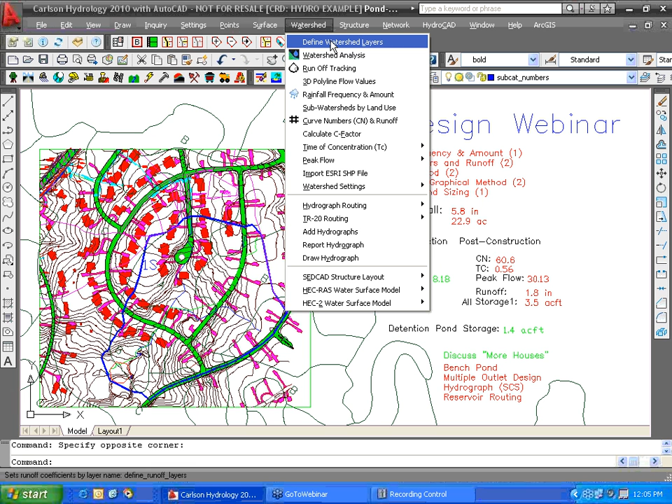The starting point for this process, internal to Carlson Hydrology and for feeding into HydroCAD, begins in the watershed pull-down, Define Watershed Layers. Can't say enough about this very first command in terms of its critical automation.

We can do our watershed runoff analysis by the rational method, but for feeding into HydroCAD, and for detention pond sizing in general, we recommend the SCS method.

And if you click on HydroCAD layer designations, which are several pages with this form, I have a short form so you can relate to it easier for this example. This is a HydroCAD look, if you will. Okay, we're going to do the SCS method.

In addition, your eyes need to go down to this lower zone and note some of these layers for the automation. For example, we can have soils.

If I move this out, I have soil boundaries with soil types designated by A, B, C, and D - simple letters within boundaries that don't have to be closed polylines. They just have to meet and enclose, as separate lines or closed polyline regions.

These soil maps are available on NRCS sites and various state sites all across the country. The country is almost fully mapped in terms of what's available electronically.

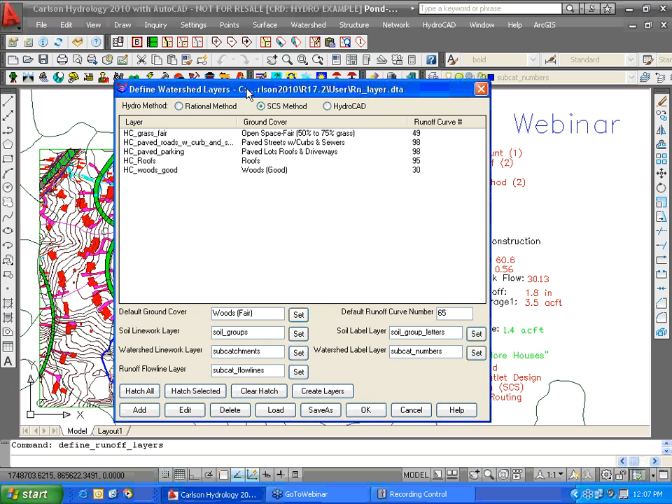So this blue watershed here is drawn in the subcatchments layer. And we've even drawn a runoff line, calculated by our runoff command, in the layer subcat flow lines. So everything is accounted for here.

Just for a quick look, for example, the red roofs on these buildings - if I click on HC roofs and hit edit, you see a hatch, color red. I have a 95 runoff curve number, and it's coming from a library, editable, which has distinct runoff coefficients or curve numbers based on soil type.

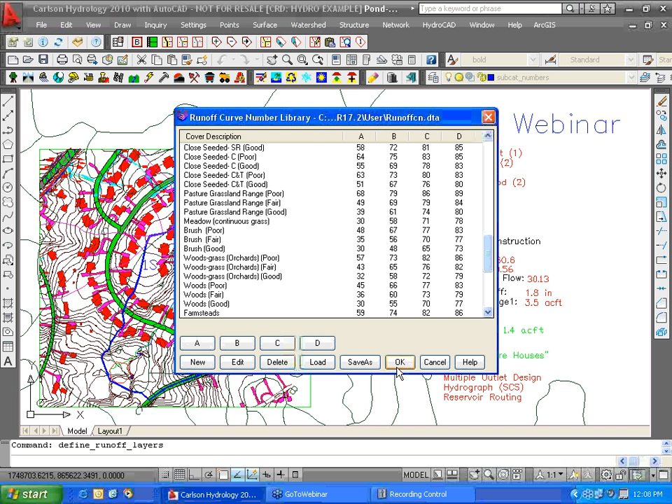So when you have woods, for example, good woods would absorb more of the rain, letting less runoff - lower runoff coefficients or C factors, curve numbers. We have quite variable results depending on the soil type. Okay, so this is how each one is defined up here.

Now it leads to this hatching. If I clear my hatch, you see it goes away. So this hatch is primarily a verification tool to be sure that it looks good. I just hatched them all again, and I'll hit OK and exit.

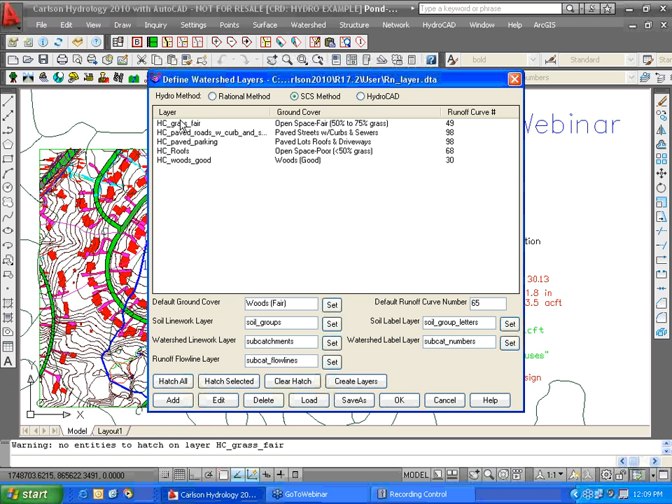So this starting point, both the hatching up here and the layering down below, set up the entire automation process. Now we'll review this procedure, first taking it in, and then we'll go through individual items.

One time - that's why it's in parentheses - you need to determine your rainfall event, rainfall frequency and amount, to set your rainfall for the calculation of the detention pond sizing. You're going to use the 100-year event, 50-year event as second.

Then, twice, you would do your curve numbers and runoff - once for the pre-construction condition, and again for the post-construction, leading to different curve numbers. Now I've got my answers here that we will recreate on the fly, but for reference.

Then you do the time of concentration twice, for pre-construction and post-construction. Then you do your peak flow twice, pre-construction and post-construction. Then, focusing on post-construction, note your runoff condition, and as a point of information, what size pond would store all the post-construction runoff in case you have no intention of reducing the flow and just want to capture it all. That's worth noting, and it's reported in one of our watershed pull-down commands.

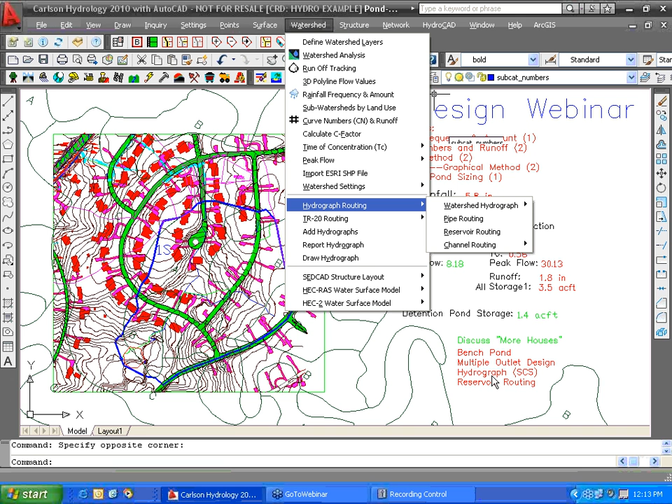Through a designed pond with outlet structures, which give you a stage-storage curve and stage-discharge curve, which then, through the reservoir routing command, lead to final verification that you've got the right stage discharge to reduce your post-construction flow from 30 CFS, in this case, down to 8 CFS, the pre-construction condition.

Okay, so the roadmap is important. A map of how you work your way through the package is critical. Now we'll do a few of the commands. Certainly under rainfall frequency and amount, that's very easy to do. I've already made a tin, by the way, out of this.

I should point out, when you make a tin file of the surface, it's best when you have nothing but a contour map to work from, to add high and low streams and ridge break lines yourself as 3D polylines. I have that particular stream break line, and sort of a ridge break line over here, another stream break line, and they help draw the water in, getting a more accurate surface for the area involved.

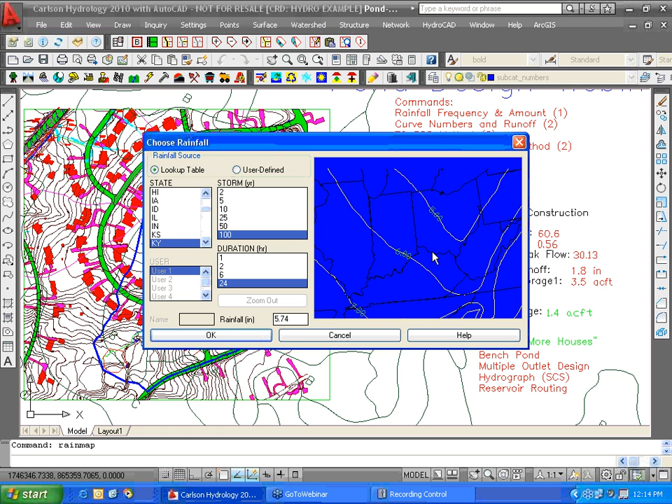Okay, frequency and amount is very straightforward. You pick this command, select a point on the map, or go find my state. I'm very familiar with where we're located, Maysville, Kentucky. I'm going to do a 100 year, 24 hour event, pick just around Maysville, and get roughly 5.74 inches as the rainfall amount. Now I would go straight to runoff.

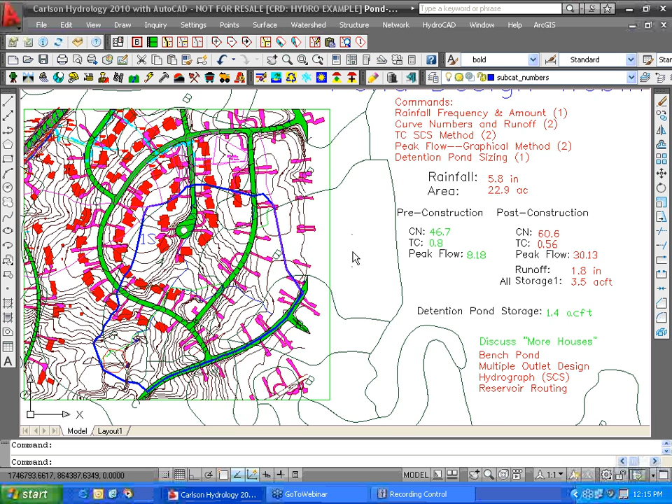Now what I'm going to do is increase automation. To continue the roadmap concept, I'm going to do this in the regular watershed and structure pull-downs, and then reveal the added automation found under HydroNet Explorer, which is also the doorway into HydroCAD. So I'm heading there ultimately, but I'll go through this process as already outlined first.

Okay, so the next thing we're going to do is get those curve numbers, that's next on our list. We have our rainfall, roughly 5.8 inches. The area, you can compute that boundary as 22.9 acres. I want to get the pre-construction curve number and the post-construction curve number.

Let's go in and do the pre-construction, what I would call the old-fashioned way. The first thing I'm going to do is go to View, Isolate Layer, and isolate to my soil, two layers involved, line work and letters, and to my watershed.

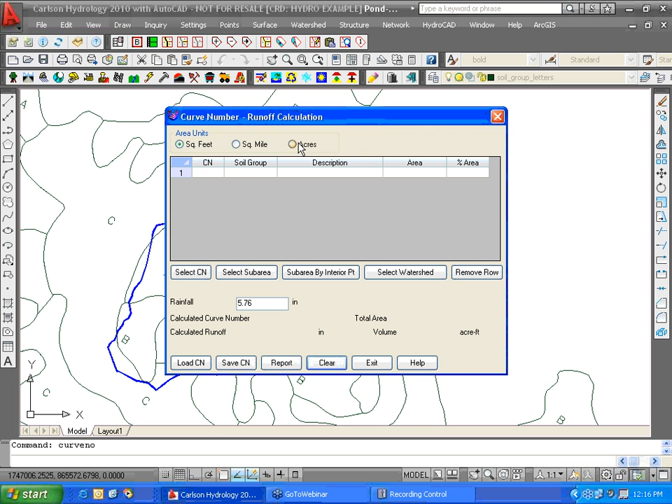Then hit Enter, and there you see the soil zones laying in behind. Now here's what I would call the old-fashioned method of doing this. If I come into curve numbers and runoff, I can clear what's there, switch to an acres mode, and select my curve number.

Let's say the entire site was good woods. So we go down to woods, but it's different soil types as you see. So I go to woods, good, and focus on A first by clicking A down here. Now I've got the zone, but I don't have the area. To get the area, I can do sub-area by interior point.

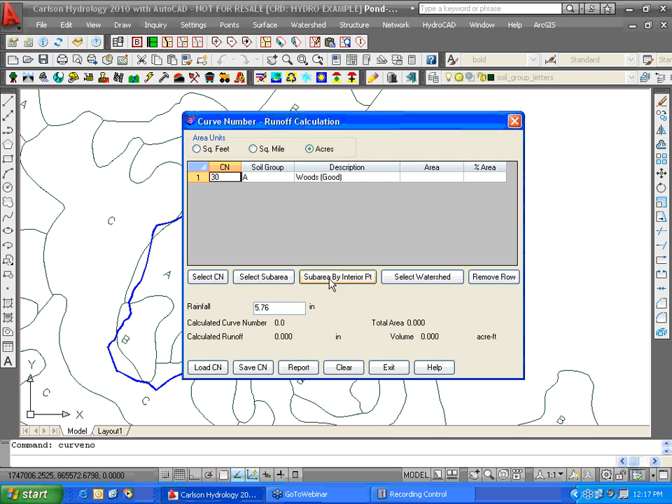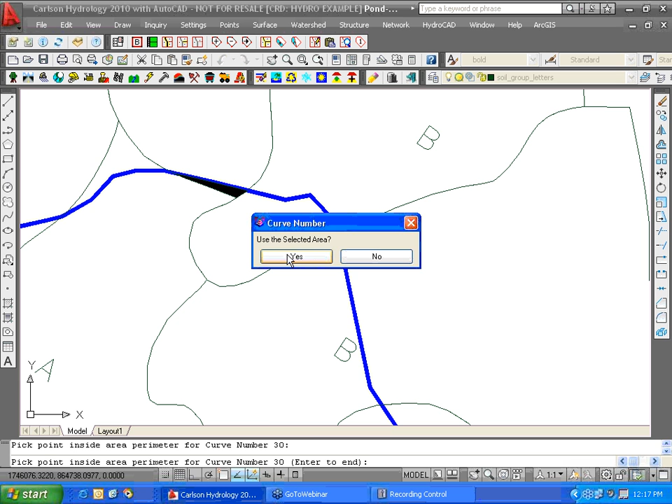All right, so I look for A's. This is an A here. Include it, yes, but I'm not done. I can kind of scroll in and get that little bit of A there. Include that, yes. I can come back out, and there's a little bit of A coming through over here, and I get that one. And that's good, and I hit Enter. Look at the command line, Enter to end. And I've got my entire acreage, 10 acres of the A zone.

So I go to my second line, select my curve, how it was done, in the old days with our package before increasing automation, but you need to witness this. I hit B, and I'll complete that process.

We'll click into it and pick some sub areas by interior point. I hit the B here, use it. I got some more B over here, use that one. I can see some B down here and use that one. I think that's it for the B, and hit Enter and continue on with select curve number, and you're getting the idea here. That's the purpose of these webinars, is just to get the mechanics of the process.

This is soil type C in my good woods, and I click into that zone, so I know that my sub-area picks are going to go to that particular zone, and I pick sub-area by interior point, and let's get some C. We got some C here, and that found its way all the way around. That's good. And is there any more C? A little bit here, it looks like. And I think I've got everything but the remaining D at this point. Hit Enter and wrap it up with select number.

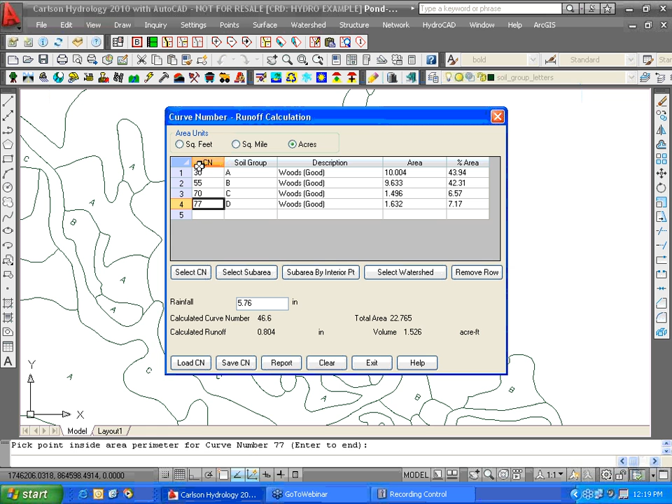We have a calculated runoff of 0.8 inches, and that volume would store everything there. But remember, this is pre-construction. So I can make a report out of this and send it on with some header information, but I'll get out of there and hit Exit. That is all recorded.

Restore my layers, and we have a 46 curve number by doing that method, and TC and peak flow, yeah, continue on and do that process. So when we come down over here, we've completed our curve numbers and runoff. In tune with that command as we work down. Remember, we do it twice.

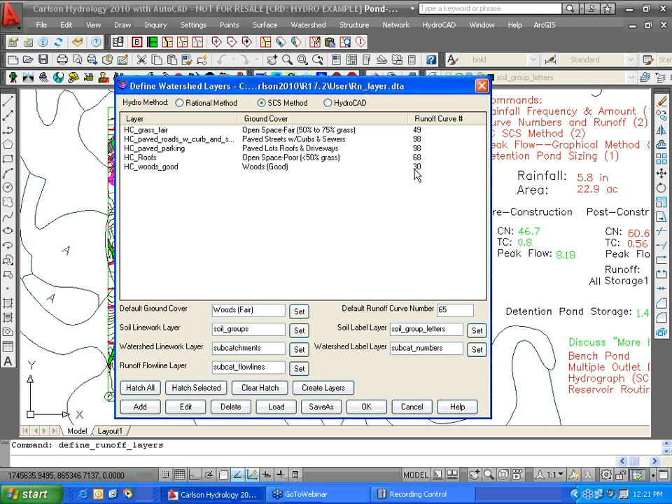Now keep in mind, these will actually pay attention to the soil types automatically in the curve number calculation routine. Even though only one curve number shows here, it shows the A column by default. Remember, the woods were 30 for the good woods. This is a little bit, you have to understand this. It's showing the A column by default, but it's going to calculate all the soil types, composite the curve number up automatically with those layers defined using this command, curve numbers and runoff.

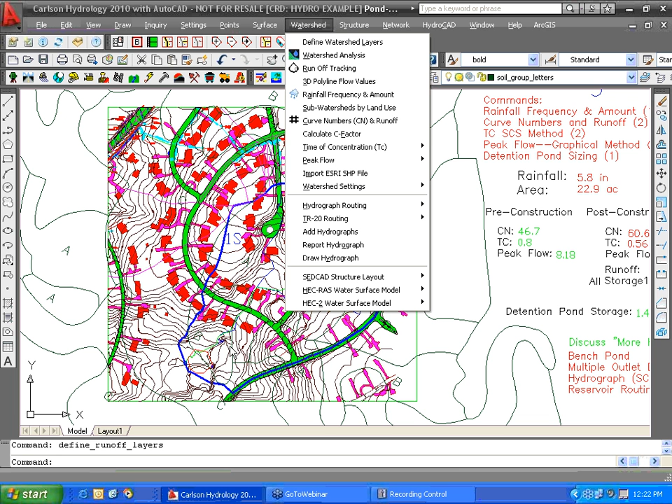Now, it would be difficult to do the existing and the final in the same drawing because it actually finds all frozen layers. So if I wanted to do the existing, instead of that pick one at a time approach you saw earlier and just had one big perimeter for the woods, I would have to have that in a separate position moved over to different coordinates or in a separate drawing, because it will find all layers thawed or frozen when it does this process. I only have the layers for my design working right now, so I repeat that command.

I clear what I have previously. Hey, note, 46.6, pretty darn close to the 46.7 worked up in preparation for this. 0.8 calculated runoff, there it is. So these numbers are right there.

We're now heading over to the post-construction condition. We're looking to get those two numbers. So we clear what's there and then do a much more automatic thing than the one-by-one interior point pick. We do the select watershed approach. We hit select watershed, look at the command line, perimeter or interior. I hit enter for perimeter and pick the perimeter watershed.

It calcs, it's doing all this sort of GIS level cutting in just a split second, and there you have all 4 soil zones of Woods Fair, not just the one in the list of soil type A, but you have all of them. Actually, I must be using Woods Fair in this condition as opposed to Woods Good for the post-construction condition, which may make sense with all the construction that goes on. No, this is the, yeah, I have a little bit of remaining post-construction condition on woods, apparently.

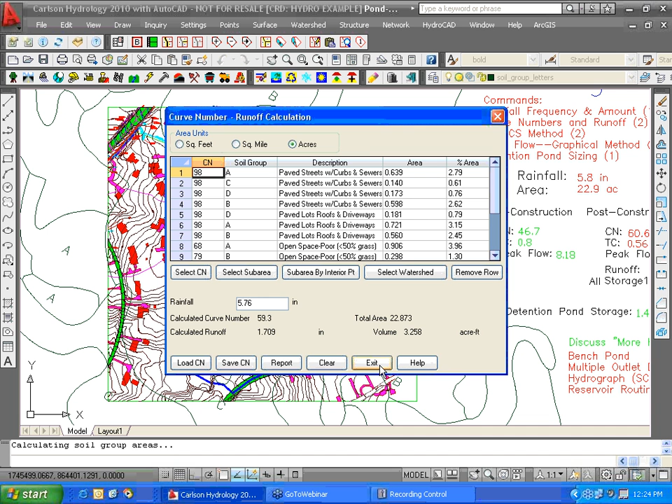And then we got these numbers here, and I got 59.3 versus 60.6. Let's see here, that's very close, so that looks good. And look at our calculated runoff, 1.7 and 3.3. Let's take a look at what we had calculated, 3.5. Basically, the source of the numbers by just clicking the perimeter. All right.

Now, the next step is going down the numbers and runoff, both ways, interior pick and where it cuts through everything, soil types and layers. Now we go down to time of concentration, and we do the SCS method. Now, some people would call this the objective method. There's a lot of subjectivity in the TR55, and Peter has sort of explained to us many times that this was almost a paper and pencil kind of cheat sheet approach before computers allowed the pure objective automation of the SCS method. Let me show you what I mean by the objectivity of this method.

If I come in to the SCS method, I get a simple dialog. Where I'm starting with, well, how about 46.7 for the pre-construction condition? My length of flow, I can pick flow line right there on the map. So I select the flow line and pick it. It finds that. Now this is neat. The average land slope, now that's not of the flow line. That's of all the land inside your watershed. That's where the automation of computers comes in.

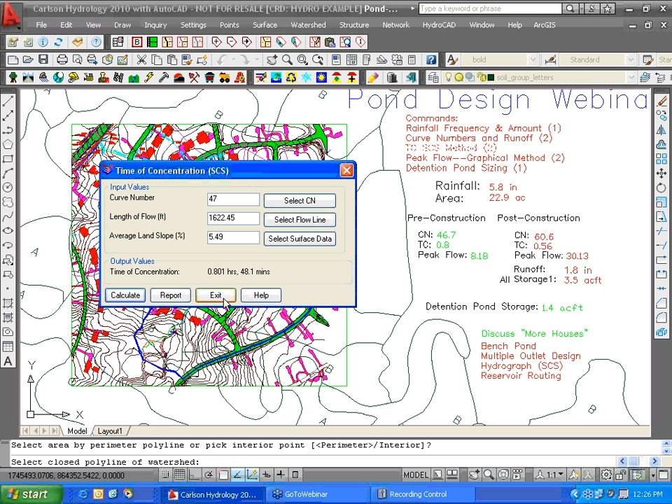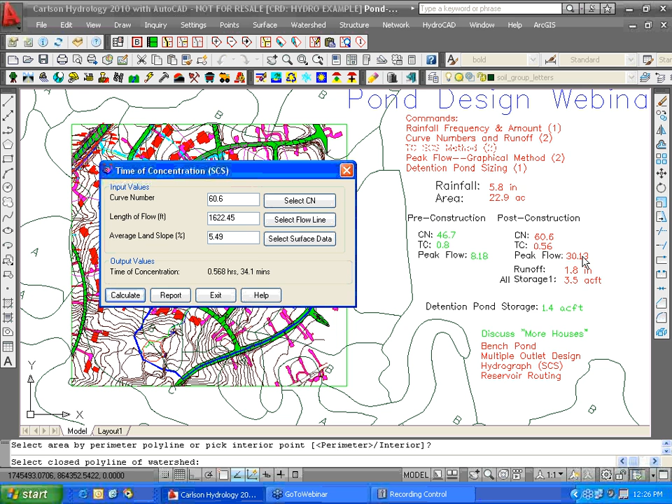Now, we can basically stay in the command and go 60.6 for the post-construction. Let's say we have a similar total length of flow and a similar average land slope. It would change with post-construction, but in this example, I really don't have a post-construction DTM, buildings and roads over a pre-construction DTM. So I just don't have one. It may change. There may be a different average slope. You would enter that, calculate, and you get your different time of concentration, 0.56, you see it there.

We worked our way down through time of concentration, now on to peak flow. Graphical method, very straightforward. Up comes the dialog. Let's focus on pre-construction. This is the all-important command that tells us what we're trying to get down to from the post-construction conditions. So we put in our curve number of 46 or 47, and we put in time of concentration of 0.8, and type 2 storm is pretty typical for a large part of the country.

And when you calculate, we're looking for a CFS, and you can see just from slightly different area, I think I had 22.9. You know, things will change ever so slightly as you adapt up to the precise numbers. And so we have roughly 8 CFS as our target. Now, staying in this command, let's walk down it. We're using it twice on the post-construction condition.

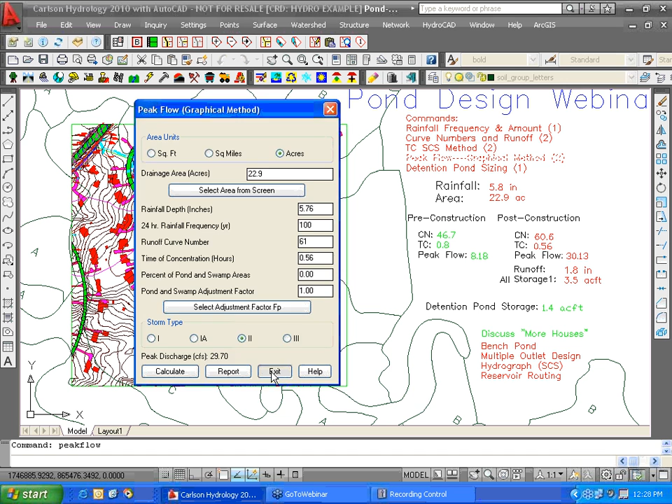Curve number has ramped up to 61. Time of concentration has slipped down. Things running off faster, 0.56, see if it takes 2 decimals. And I believe everything else is still good. I'm looking for around 30. Yeah, 30 CFS matching that condition. So having a little chart like this is very helpful in kind of working down through the software.

And I know one or two of our programmers are listening in and would like to focus attention on the sizing command to actually build in some of the input commands process.

Currently, it just uses the results of the watershed effort to plug in the numbers. So I put in my peak inflow discharge, which I'm going to call 30.13 to match what I did in preparation. I want to get this necked all the way down to 8.18 with a detention pond.

And we saw this earlier. Our post-runoff condition, post-construction, is 1.8. And we go ahead and calculate the ideal pond size, and that's where we get the 1.4 acre feet. And approximately 3.4 or 3.5 would store all the water if you didn't want to bother putting in any spillways and over-design a pond and build something extremely large on the site. So that is the process that leads us to this point.

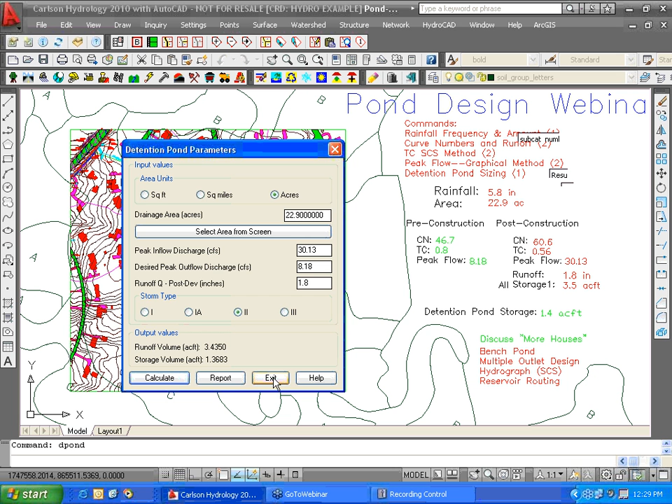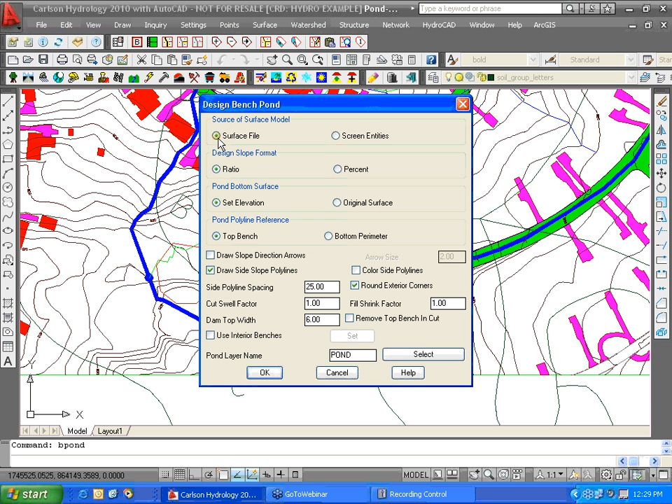Now, let's continue on down with the assignment. In the watershed, I've got a little pond laid out, and I've got to do the design. We'll do that very quickly. We go to the structure pull down, and we design a bench pond. I'm going to use a TIN surface to do this, and just hit OK. There are several options you can play with. The top of the pond is just a regular polyline. It's a dumb polyline at 0 elevation. It's just a perimeter. This is my TIN file for the watershed.

And I'm going to do an outslope of 3:1, an interior slope of 3:1, and I'm going to go from 815 down to 810. And here's my storage, and it tells you it's not big enough: 1.2 acre feet. I want about 1.4, 1.5. So I can adjust my parameters, not balance any cut fill. I'll keep my outslope the same. I'll make my interior slope 2:1, and I'll start at 815, but go down another foot to 809. Offset the dam? No. And now it recalculates.

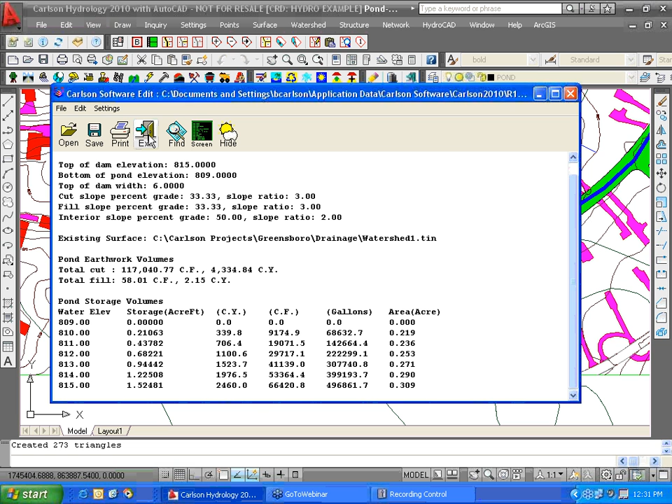And notice I've increased it to 1.5. That's a little bit more than 1.4. For those designers out there, it's a real challenge to get your spillway design such that the minimum pond it recommends works. I like a little margin, so I'm going to go to 1.5 and avoid the precise 1.4 absolute minimum size that could possibly work with the best spillway design imaginable. There are your volumes, and I'll hit exit.

Adjust the parameters? No. Write a stage storage? Yes. And I can call it pond 2 capacity file. Update the target surface? No, but I could. Write out and trim contours? I'm not going to bother. Or contour the pond. I should point out to everybody, this thing can be moved. Be aware that you can edit a design bench.

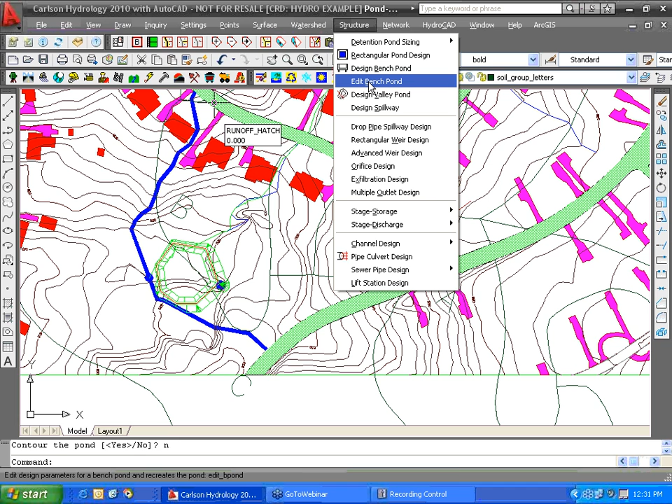Provided it was designed against a TIN as I did, I can come in and pick almost any part of this thing, and you have a complete design window off to the left where you can, for example, move the pond to a slightly different position, rotate the pond, do whatever, reprocess, and it dynamically places the pond in a new position. I can exit out of there, and all the pond parameters are there for you to work with. The pond has the same stage storage.

Done the pond, I've got to do multiple outlet design. So I come down here to the structure pull down. We did a design bench pond. We edited the bench pond. Bench pond is sort of a relic term from our mining days, but it's basically on the land, enclosed. Valley pond is an alignment across a valley which dams up a valley. It's a different approach. Very strong pond design all throughout Carlson Hydrology and Carlson Civil. From a DTM standpoint, perfect to feed into HydroCAD.

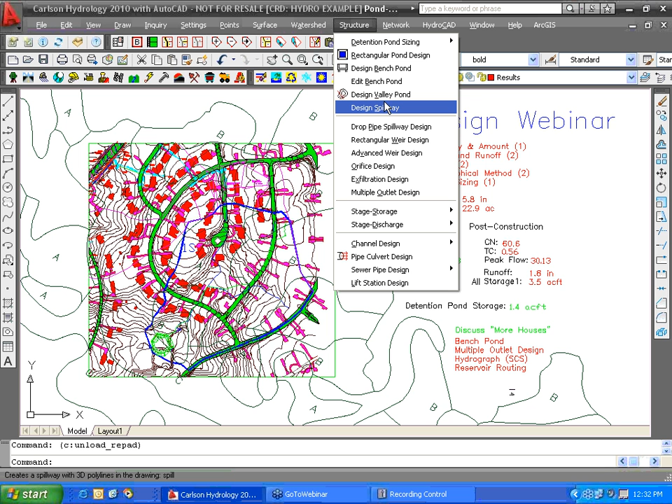Now, HydroCAD is very strong in very subtle and advanced outlet designs and even underground storage, and Peter's going to be addressing that after I finish my portion. But here's some basic multiple outlet work you can do. Make a new file called pond 2. It's multiple outlets. Now here's what you might do.

You might start with an orifice, call it base flow, and you might say, let's go with a 6-inch orifice at 809 to keep the mosquitoes out and drain. Headwater elevation of 815, as we know, and you can hit OK. You don't have to do your stage discharge on each element of the discharge.

Wait till you're done with the entire process. So hit OK. Move on and add perhaps what you might call a principal spillway as a simple culvert. What I'm going to do here is just run a pipe right through the wall of this dam, of this little pond, and I'm going to make it corrugated metal, read from my library and pick up perhaps a 15 inch, and stick it in there at 3 feet below the top, so I have 3 feet of freeboard. And outlet, I'll drop it 2 feet down over a length of 60 feet.

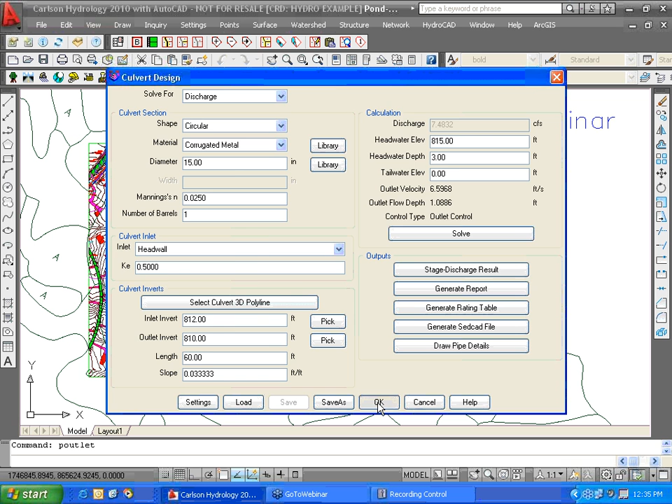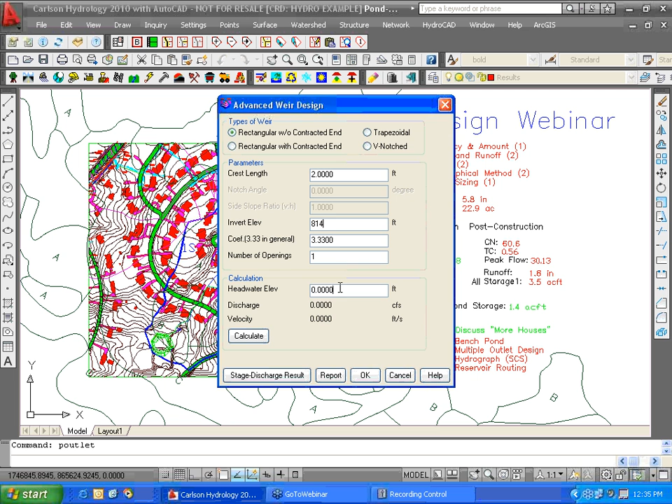So what I'll do, just for a little overflow, add an emergency weir, and I'll give this guy just a little tiny crest length, 1 foot below the surface, just to prevent anything from overflowing, and hit OK on him. And that's how you might put in multiple outlets. Now you've got to hit the stage discharge here, because we need this as an input later. Water's at 809, maximum's at 815, increment maybe 0.2, and hit OK.

And then this should calculate out the, did I hit OK? Should calculate out, there it goes, the stage discharge. And everything's drawn. Write that file. Don't forget to write it as pond 2, STG.

Whoa, that's on my speaker.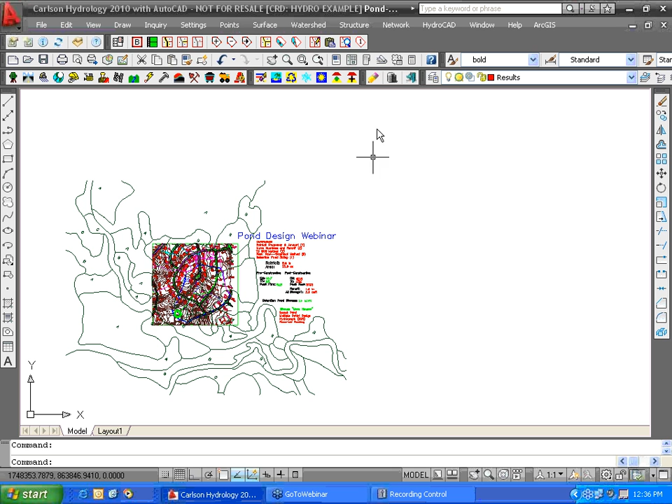That came a loud beep here, and we'll hit close, and you're good. And you're almost down the bottom of the list. Save the changes to the current file. Yes, everything's saved. Okay, you can move over to the right. I like this command for you CAD guys. If you have stage storage, draw your stage storage on that little pond we designed live here. You could come over and select the file.

There's everything there. Let's get your spillways lined up here. Principal was 3 feet of freeboard. Emergency was actually 1 foot of freeboard. And clean out's an arbitrary thing, but maybe you want to clean out from time to time. You can put in different header information. You can hit OK. It defaults some very nice intervals for the gridding that it's going to do.

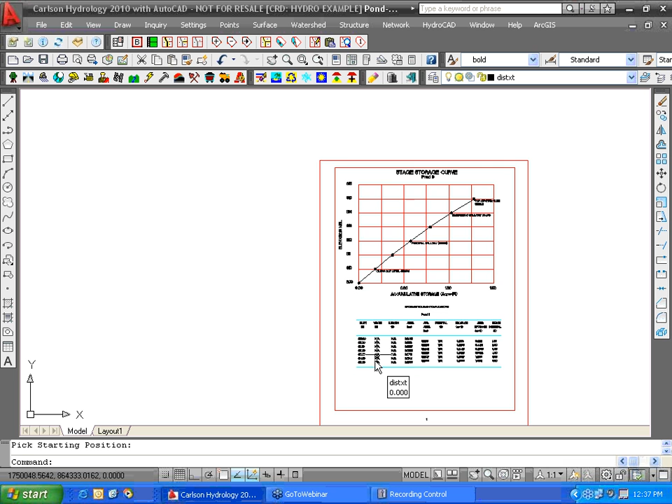And then you can come over here to the right and get a beautiful 8.5 by 11 stage storage curve, fully labeled out. I've got an Arial font active right now for my title, so it's a little bit bold, but that's 8.5 by 11, and one more convenient thing to submit.

Hydrograph, I've got 2 more steps to go, and I've got 2 minutes to do it, because I want to give Peter plenty of time to take it from there. And I actually want to hit HydroNet for the total automation on the way out here. So very quickly, where do you go next? Well, you've done your pond designs and so forth. You go to Hydrograph Routing, because I want to get a hydrograph.

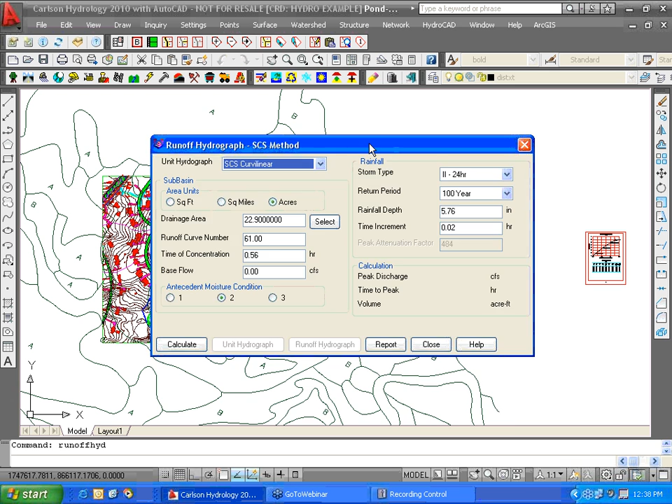So I go to the SCS method all the way through here, and I've got my acreage. This is my post condition I'm focused on now. These are the right values for the post condition. They're in there. They're correct. My base flow, I'm going to say, is 0. I've got my correct storm, and my time increment is fine. Pretty much everything was filled out for me, and I hit Calculate.

And then I go to my runoff hydrograph, and there it is. And there's that same 30.1. Look how it's all sort of tying together. And I save this as pond 2, okay? And then you close, and then the final reservoir routing to see how that pond actually did is you come on down to

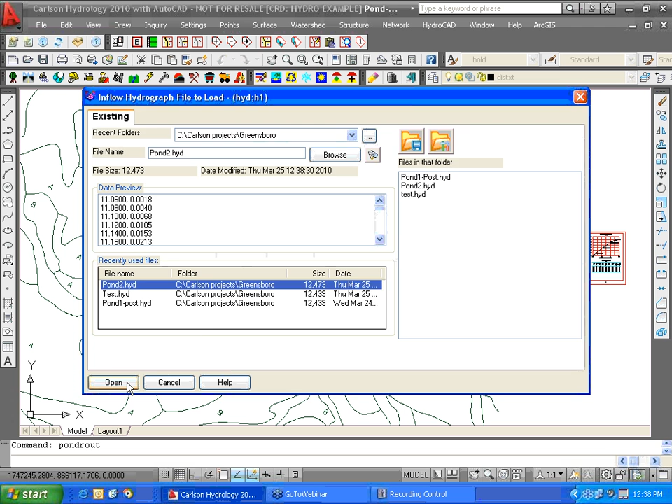Hydrograph Routing. You're done with your hydrograph by the SCS method. Slip on down to Reservoir Routing. It's all in that little list below. And you select your correct hydrograph, which is Pond 2, made just now. If you want to use the actual files we just made, use Pond 2 capacity and use Pond 2 stage. And let's see how we did on the routed hydrograph starting at 809 elevation, time equals 0 water.

And yay, what was our goal? To get down to 8 CFS. Got down to 7.7 CFS. I kind of over-designed just a little bit, but we got away with it, and we started with 31 CFS down to 7. This is the essence of the design inside the module.

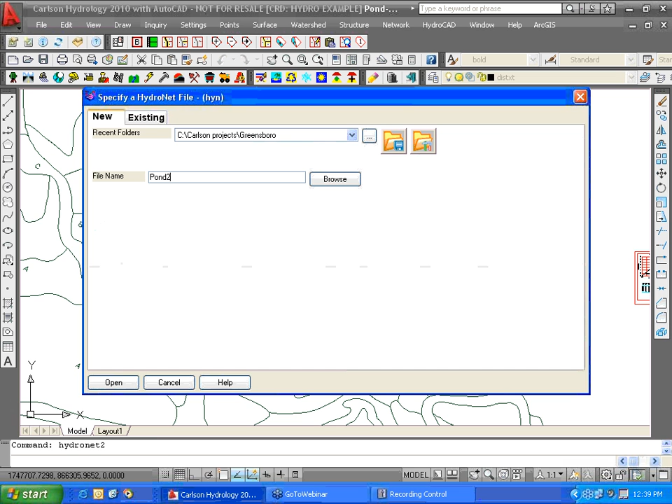Now, for the finale of auto, a few steps, but it's not that many if you look at it. You just work your way down. It's all under your control. Now, this has been sort of integrated into the HydroNet Explorer. I go over to HydroNet Explorer, and I'll make a brand new one, and I'll call it Pond 2. And let me see if I can show the integration here.

Just give me a second to get my set. Give it a rainfall. I'll go to my rain map again. Pick on Kentucky. Go to 100-year, 24-hour. Pick about where I'm at. Get a rainfall event that in this case, I name as Maysville, and I save that, and it's here.

I also go back to the general and make sure I get my surface file in there, though it'll prompt you if you don't do it, much like RoadNet. You can't go forward if you don't have that surface. The rest is all good. One thing that's important is that we're going to use the curve number lag method. This is important to feed into HydroCAD because it adds to the automation to use that approach first, but you can also do TR55.

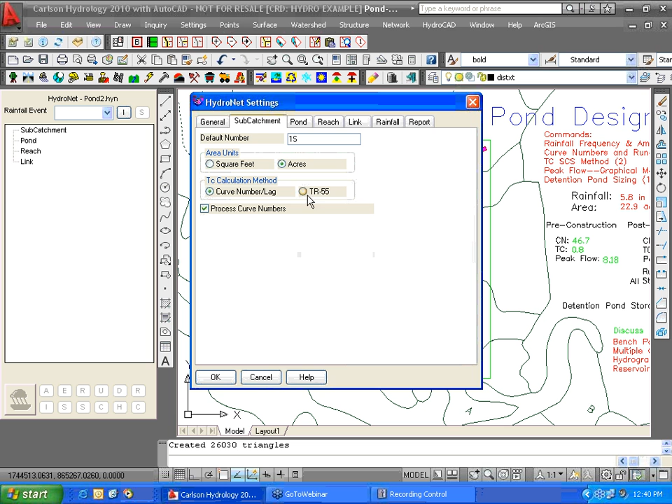Okay, you hit OK, and then this magic update button takes over at this point. With my watershed named 1S, because it's in the correct layer, as is my perimeter, everything's layered correctly according to that watershed top item. I just hit update. And I hit OK. I won't go to HydroCAD because Peter's going to take it from there. He's already done it. And we wait it out.

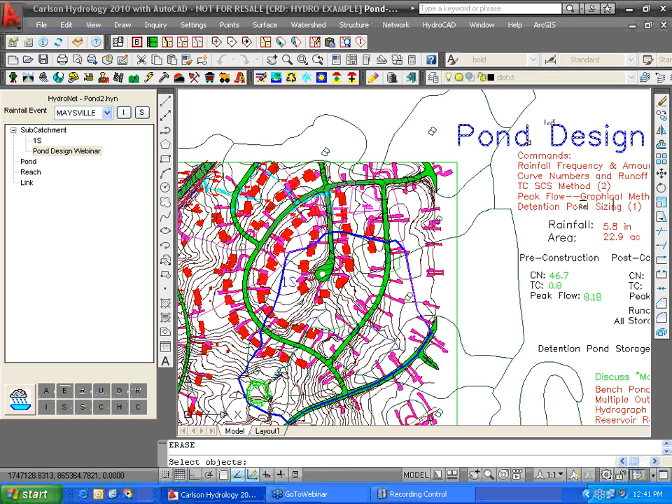Okay, how did I not get a subcatchment name? Looking for pond design or pond design webinar on layer subcat numbers. Created two sub. Oh, I'm sorry. That was my bad. I actually put my pond design webinar. What I might do is just erase that. I wonder if I can delete that one, remove it, and because of that layering, I actually got my actual factored in as a watershed, but I got the one I want over here. So that's sort of an illustration that it takes those layers very seriously.

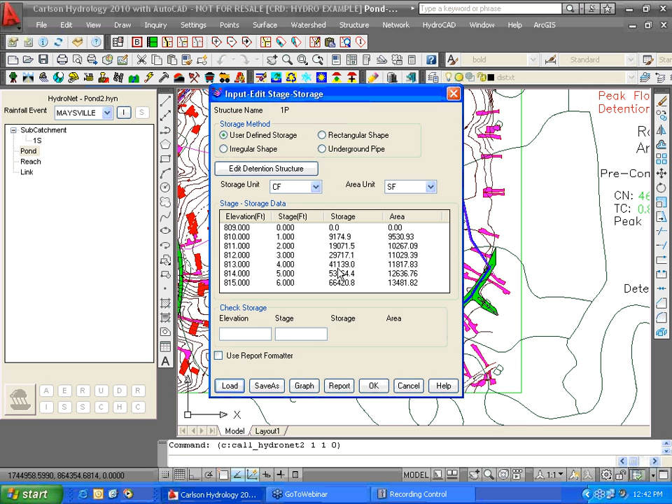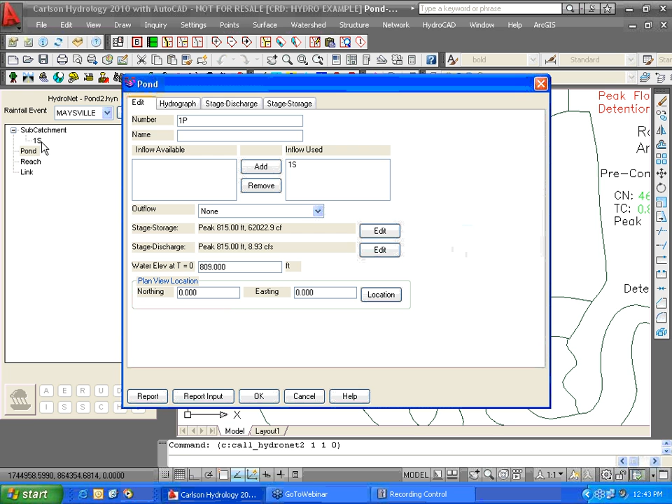load my Pond 2 multiple outlet design, and I have those here, and now, just by the sheer act of loading those under the pond, which I right-clicked and associated with my 1S subcatchment, the one we've been focusing on the whole time, I have my before and after hydrograph. I've necked them down a little bit more, down to about 7 CFS versus 8 in terms of the rainfall event I chose, etc. Maybe slightly less rainfall. And there's my stage storage, stage discharge.

So you still have to do the detention pond sizing one to figure out how low a flow you want to go to. But the point is, a lot of the steps in the pull downs were automated by this tree design of HydroNet Explorer, including the direct link into HydroCAD.

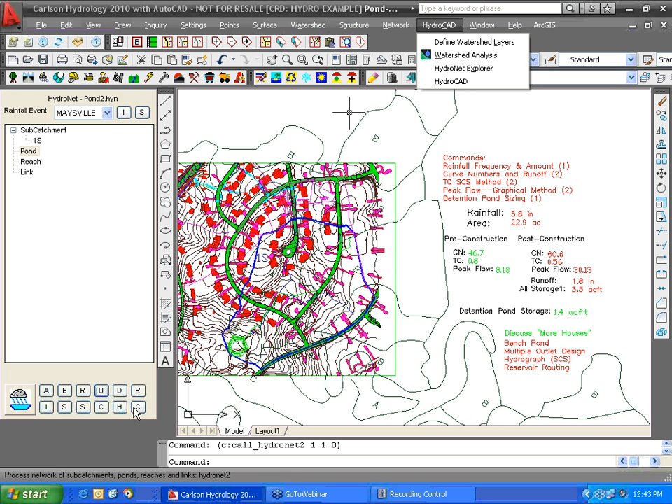So with that, to send it over to Peter Smart, and I'm going to do that by changing presenter, right? Oh, our IT person is going to do it for me. Over to you, Peter. Okay, excellent. Thank you very much, Bruce.

That's really a great look at some of the powerful capabilities in Carlson Hydrology of being able to do things like the pond designs and lay out that stage storage information. What I have here is now the file that you would generate when you export from HydroNet Explorer to HydroCAD. Then we can create a HydroCAD project file automatically, which has all of the information that you were working with. And we have here the subcatchment, the runoff information, and then the detention pond that you've designed, including all of the storage and outlet controls.

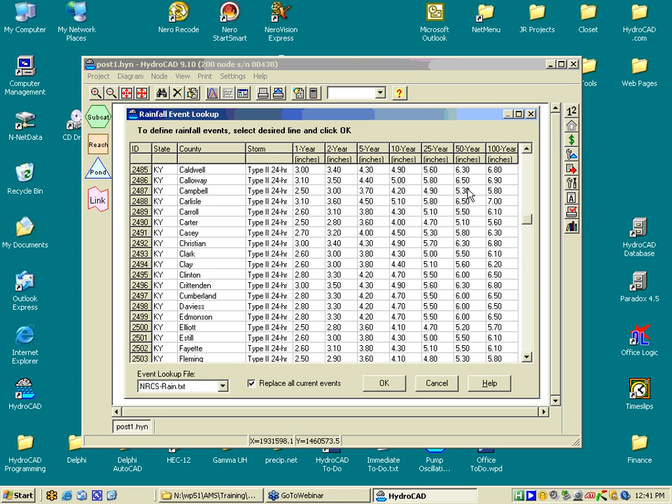And the first thing I want to do here to work with this in HydroCAD is to go to our calculation settings on the rainfall tab, and we want to look up the rainfall information for your particular location. And so if we come down by state and by county, we can pick up the particular info that matches, and let me see, 5.8 is the rainfall you had, so there's Campbell, Kentucky.

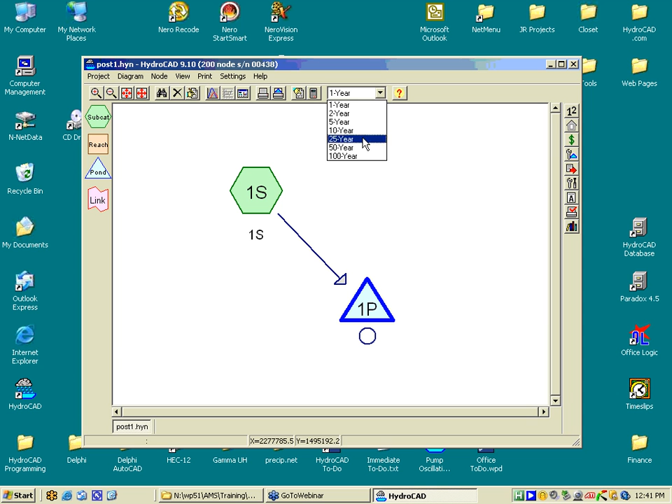I'm guessing that that's the county. And if we OK that a couple of times, we've set our rainfall, and now all the rainfall events have been automatically defined. And if we then double-click the pond, we get a report. What HydroCAD's done is it's automatically updated the calculations for all of the inflows to that pond. In this case, it's just this subcatchment.

And we could double-click the subcatchment and have a look at the report for that particular point. So we have a fairly simple project here in which we've only got that one subcatchment inflow. But the model has automatically brought the inflow to the pond. That's the green inflow curve we're seeing here. And it's doing the hydrograph routing through the pond, producing this blue primary outflow down the bottom.

This upper curve in black is actually the elevation of the pond versus time. And this report at the moment is showing us the 10-year event. If we drop down the box, we could go up to the 100-year event, and we can now see the routing results for that pond in any of those different return periods.

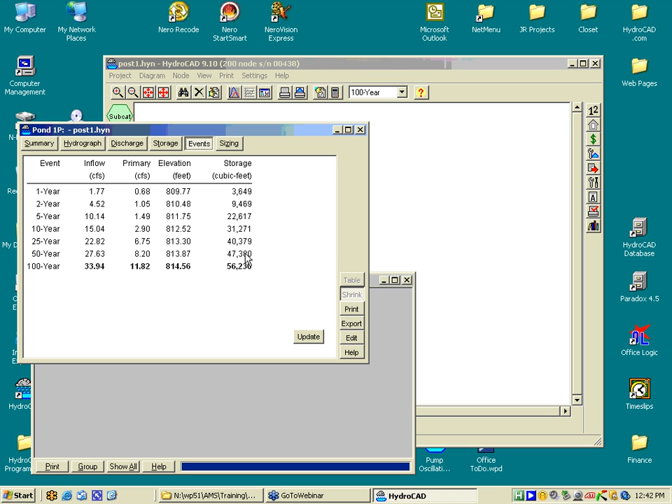We can also go to the events report and click update, and we have a complete table showing the inflow, the runoff for each of those return periods, and then the pond discharge and maximum elevation and maximum storage that's attained in each of those cases. There are a whole bunch of tabs here that you can use in order to examine not only the hydrograph, but you can look at the stage storage information. So this is based on the surface areas and contours that Bruce has extracted, and then the stage discharge curve.

And this is probably one of the more interesting reports for the current discussion. What we're seeing here is an elevation range from the very bottom of the storage at 809 up to the top at 815. And labeled on this curve are each of our outlet devices. So at the very bottom of the pond, we have a low flow outlet, which I think was a 6-inch orifice. Then we have a principal culvert outlet, which is placed at an invert of 812, and then finally we have an emergency spillway up at 814.

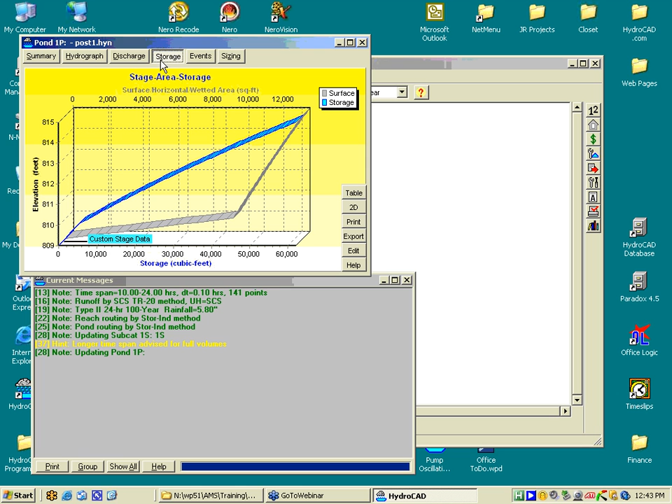And then our storage is defined a little bit higher, and that's very important that you always define storage at some point above the spillway, because the software does need to know how much storage you have as you start to flow over the spillway. And again, the storage tab would tell us the actual storage that exists versus elevation. So on the discharge tab, actually let's go back to the hydrograph. We have a single primary outflow which combines the flow from all of these outlet devices.

One of the nice things we can do in HydroCAD is we can edit this node, and we just click the edit button to do that. Come to our outlets tab, and here's the list of outlet devices for this particular pond. And let's go to our emergency spillway and double-click that. And I'm going to change the routing on the emergency spillway and just set that to secondary. So this will split out the flow so that it will do a separate analysis of what's going over the spillway versus our normal outlet devices.

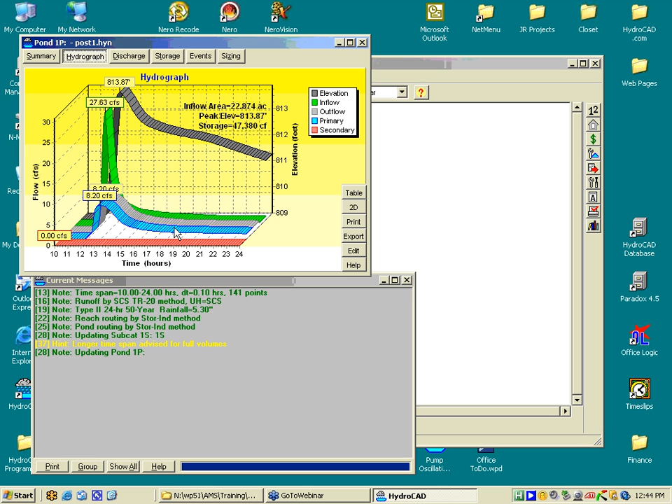And click OK. And our report is now updated to show a new red secondary outflow. So this is telling us how much is going over the spillway, which is a very handy thing to know, versus how much is going through our normal outlets. And if we were to reduce our rainfall down to the 50-year event, now we don't get anything going over the spillway anymore. So that's just to show one of the advantages of splitting out those flows. Even though the total routing calculation is the same, we get separate reporting, as you can see here, for what's coming out through our primary and our secondary outflow.

And here on the pond summary, we have an overview of all of the information for this pond. So this is the surface area at each contour elevation that Bruce has exported, and then the storage that's been calculated, and then a list of all of the outlet devices that have been set up. And what I want to do next is make some changes to those outlet devices. In this example, we have a straight culvert barrel going through the dam wall. And often you'll want to set up a more elaborate structure such as a riser or a drop inlet in order to provide more detailed management of the discharge characteristics for different rainfall events.

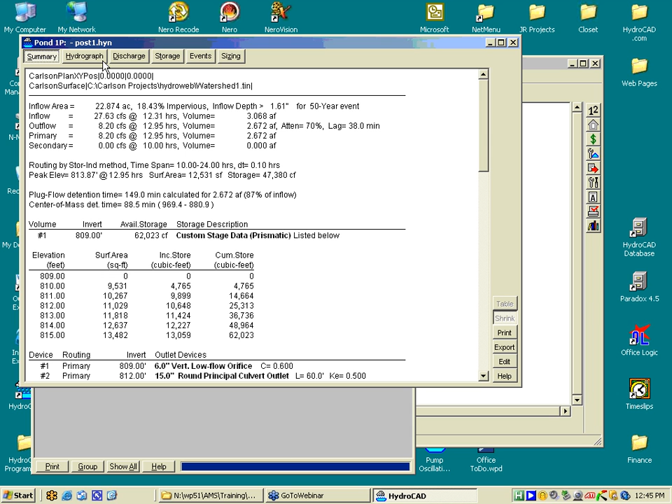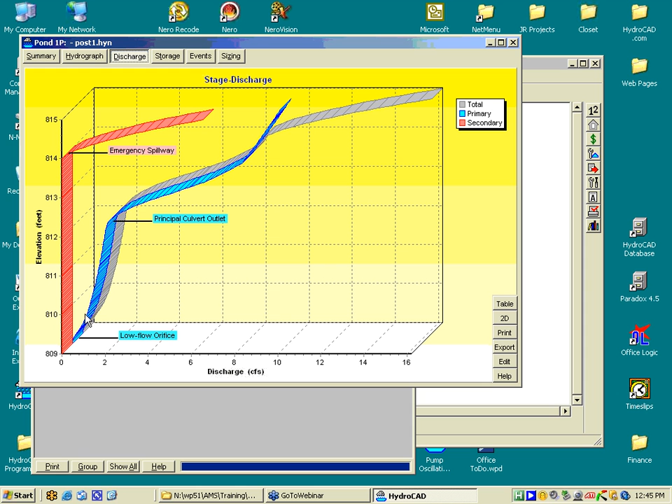So I'm going to come back to the stage discharge curve, because here we can see the effects of the different outlets. We have our emergency spillway in red, so that doesn't kick in until 814, and then our primary discharge consists of this low flow orifice and a culvert outlet.

So what I want to do here is switch to the 2D view so you can see that a little more sharply. Let's edit this pond, and I'm going to go into the Outlets tab, and I'm going to build a riser structure.

Now we already have a culvert outlet on this pond, so let's actually use that culvert outlet. I'll double click that to edit, and now I'm going to lower that culvert outlet. Rather than having it up at 812, I'm going to move it down to 810, close to the bottom of the dam wall, so I'll just lower that, and we can click OK.

So now let's edit - actually, we've already set up, we've lowered the pipe. Let's also increase the size of that pipe. If that's going to be a barrel coming out of a riser structure, let's bump that up to 24 inches. And again, we can click OK just to look at the result. We don't have to, but you will see this immediate update that we get a more rapid increase in discharge.

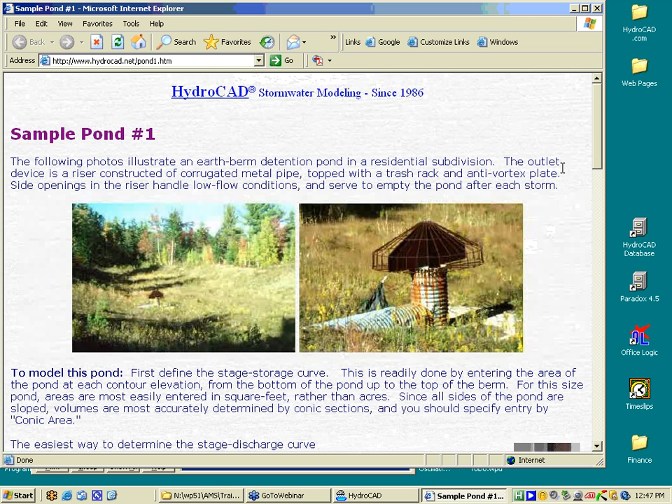So now if we're going to build a riser structure, this culvert is going to be the outlet barrel from that riser. What we can then do is set up each of the flows that's going to come into the riser structure from the side. We've got detailed articles on the website that talk about the setup of these riser structures. Often there's something like this with a culvert barrel and then a riser that's got openings in the side as well as an opening at the top. The procedure for modeling these is to set up that final device first - that's the culvert barrel we've already set up - and then to create the side and top openings and route those through the primary device.

That's really the key, and in this case, device number 2 is that culvert barrel. So let's create a new outlet device. We'll go to a blank line, and let's set up an orifice, which is going to be the top of our riser structure. So we want to put this orifice up at 812, let's say, so it's partway up into the pond. And let's make this an 18-inch diameter for the top of the riser. We want this to be in a horizontal plane.

So this is the top opening, and the software will automatically consider weir flow over the top under low head conditions and then ultimately transition to orifice flow if it should get deep enough. The key on this screen is that we want to change the routing, and we want to specify that the flow after it goes through this orifice is going to go through device 2, which is our culvert.

So moving this aside, device 2 here is that culvert. And if we click OK on this - actually before I do that, I'm just going to label this. I'm going to call this 'top of riser' just so the reports are clear. Click OK, and we added that outlet device. Then we can click apply, or OK in this case, and it updates our stage discharge report.

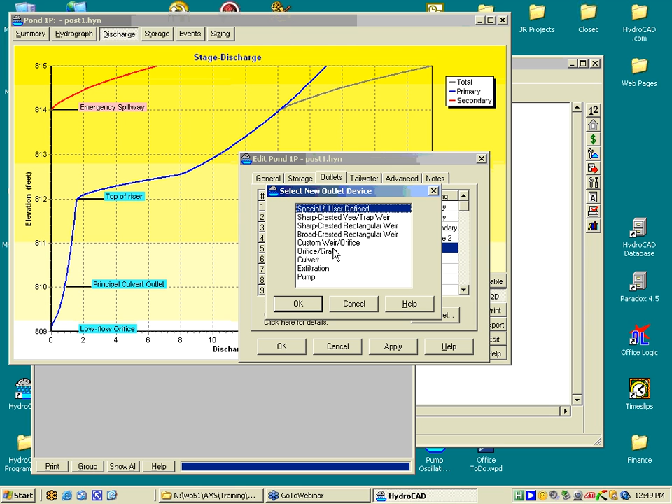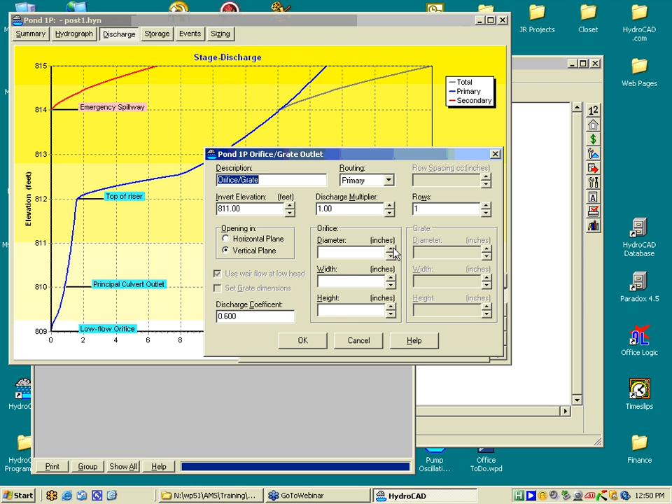Perhaps this is handling the 10 or 25 year storm, so we could do another orifice. We could put this in at 811. This one is going to be in a vertical plane because it's a side opening. Let's set a diameter of 6 inches and set the routing to device 2. Again, it's going to go through the culvert barrel.

Now if you watch the stage discharge curve as I OK this, you can now see we have a slight point of inflection here, so that when we hit that 6-inch orifice in the side, we get a little bit more flow. Then when we hit the top of the riser, we get a lot more flow.

So this is the process you can use to build basically any kind of compound outlet structure in HydroCAD. You can combine these devices in order to model almost any kind of more complex element that you may have.

Coming back to your pond summary, we can get a full breakdown of all of the outlet devices that we have in this pond. This diagram down the bottom shows you the flow, that we have this opening in the side and then the top of the riser, that those flows are being combined and going through this culvert barrel, and then those are in turn combined with a low flow orifice that we have on the entire pond, and that constitutes our primary outflow. The secondary outflow consists of just an emergency spillway up top.

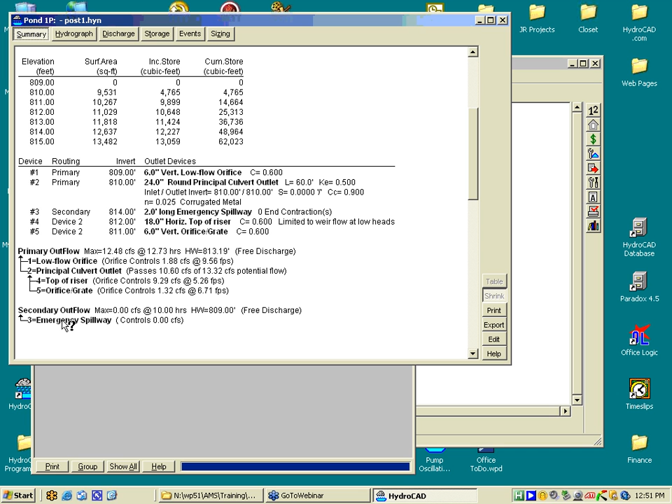So that's a basic look at what you can do with ponds. There's a lot of other features in here. There is a pond sizing report that you can use to estimate the pond size that you need to attain a reduction in peak to your pre-development flow. That's very similar to the sizing calculations that Bruce has showed you.

And of course we can go to our events tab and click update and get a full analysis of that pond for each of these return periods.

So that's essentially what I wanted to show pertaining to outlet devices on ponds. In this example, we have an above-grade storage pond that's been constructed by grading, and it's great to be able to extract that data from your terrain model and bring that from Carlson into HydroCAD.

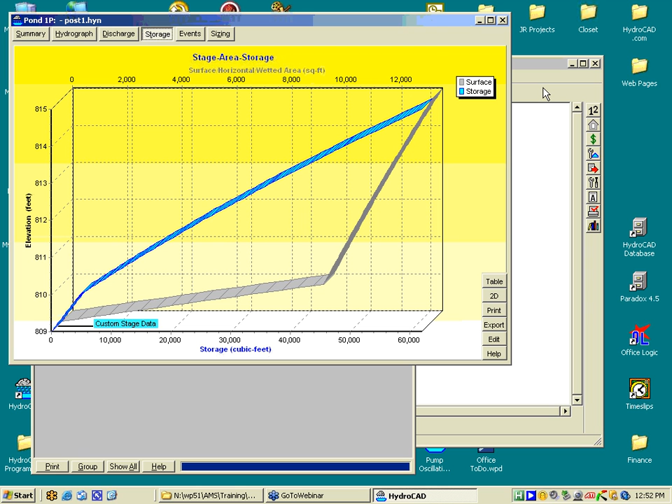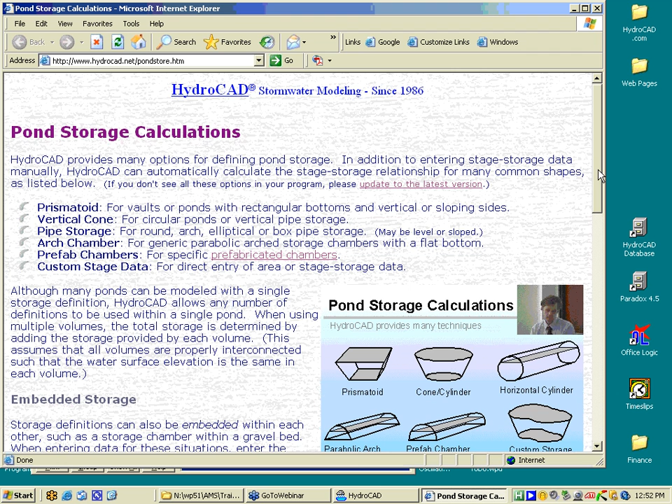Another situation that comes up very frequently, more and more often, is underground storage. Rather than putting your water in an above-ground pond, you're going to build an underground storage facility of some type. There are a number of different ways that you can model underground storage in HydroCAD. You can actually take any of the standard storage options that are available, and those could be used as underground storage. The most common of those would be perhaps a horizontal cylinder or a pipe. So you could have sections of pipe, perhaps constructed with manifolds so they're hooked together with an outlet control device, and you could bury that underground and use it as pond storage.

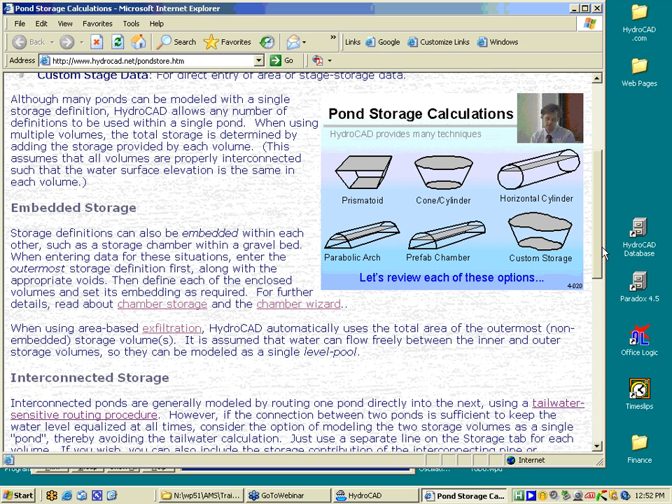You would do that by selecting the pipe storage option in HydroCAD. You can also set up underground storage chambers, and basically storage chamber capability lets you model the various proprietary storage products that are on the market. We're adding more of these almost every month now. Cultec, StormTech are some of the more commonly known ones, but there are many other different products out there. Some are square milk crate type chambers, others are arch chambers.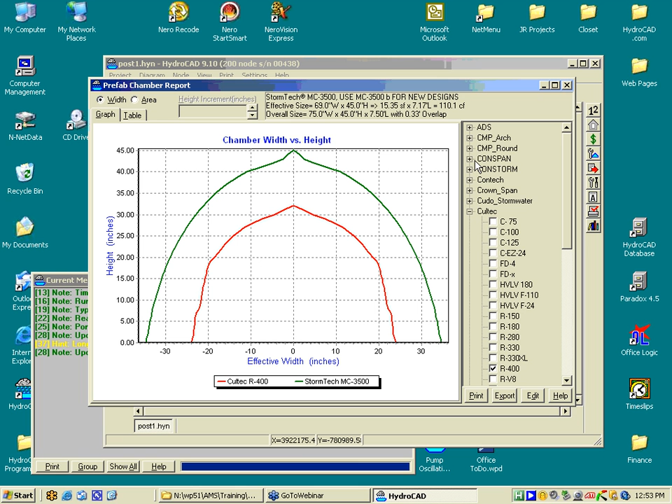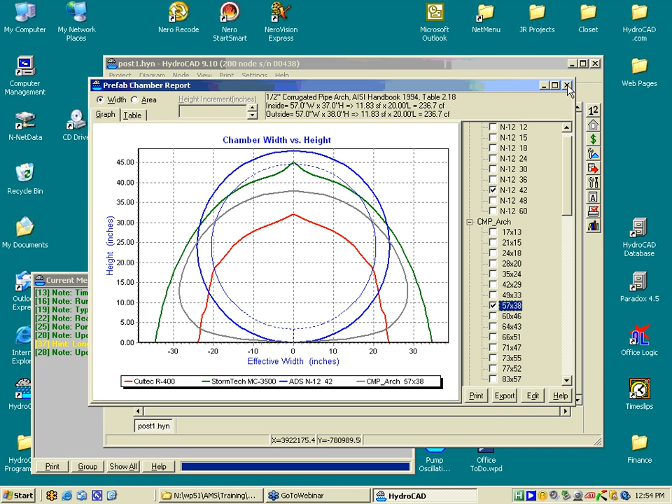You can examine the chambers that are available by, in HydroCAD, just clicking the library button and going to the chamber library. Here's a full list of the chambers that are installed. You can pick a particular chamber and see a storage cross-section for that particular chamber, and compare that to a different model or manufacturer. This library even includes corrugated plastic pipe, which provides storage, corrugated metal pipe, concrete. There is an enormous range of different options. It also includes arch pipe, which is very interesting because you can approximate a lot of the chamber shapes using arch pipe. So this viewer is basically just to let you see what's available in the library and lets you compare the different kinds of storage chambers that are available.

In HydroCAD itself, when you're setting up a model—this is an example shipped with HydroCAD showing pond storage—there are two basic ways you can set up underground storage. You can set it up manually.

In this scenario, going to the pond summary, we have an outer field, an excavation, in which we're burying these chambers. We've set up 100 of these chambers and calculated the dimensions of the outer field needed to encompass them, since we need a certain amount of stone in between them, under them, on top of them, and around the sides. So we sit down, do a few calculations, and set up the outer field in which we want to put those chambers.

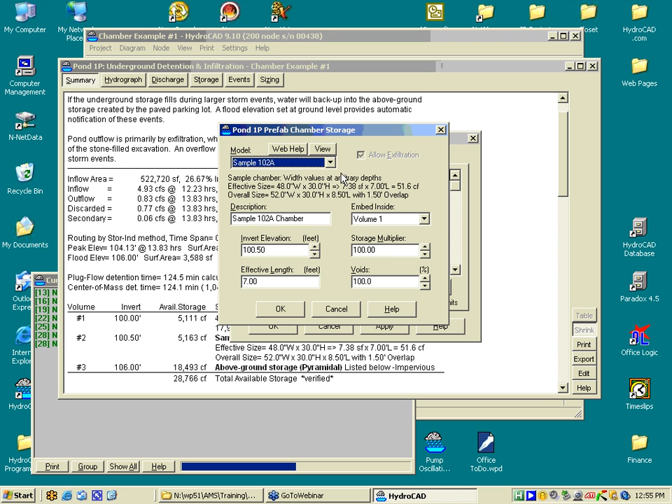If I can show you how we do this when editing: if we go to the Storage tab, here's the outer storage field, which is just a prismatoid—a box that we've created. Then we've selected the particular chamber we want to embed, and specified that we're embedding that chamber inside volume number 1. This is the magic that puts the chamber inside the stone bed and displaces that amount of stone.

We can pick the specific chamber we want to use, and go back to the chamber viewer to look at the cross-sections for different chambers. The software calculates embedding that chamber inside the stone, allowing for the voids in the stone—30 to 40%—and calculating the resulting storage.

So we then have a stage storage curve, this blue curve on the left, showing that down the bottom of the system, for the first 6 inches, we just have storage in the stone. Then we have the base of our chamber and chamber storage, and finally storage in the stone cover, and perhaps even above-grade storage as the system overflows for a larger storm event. That stage storage relationship is automatically calculated, as is the area of the system.

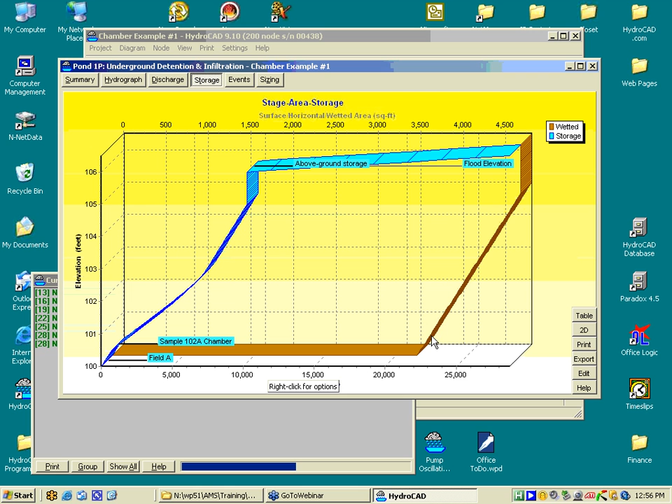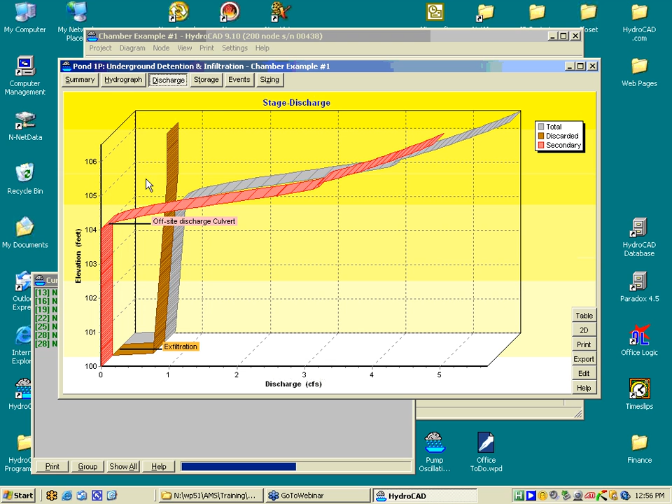This can be a wetted area or surface area, which can be used to automatically calculate exfiltration from these systems. If we go to the Discharge tab, this shows we may have a culvert used for high water overflow, but handle the lower events by exfiltration or infiltration into the surrounding ground. Those two rating curves are used for the final hydrograph routing calculation.

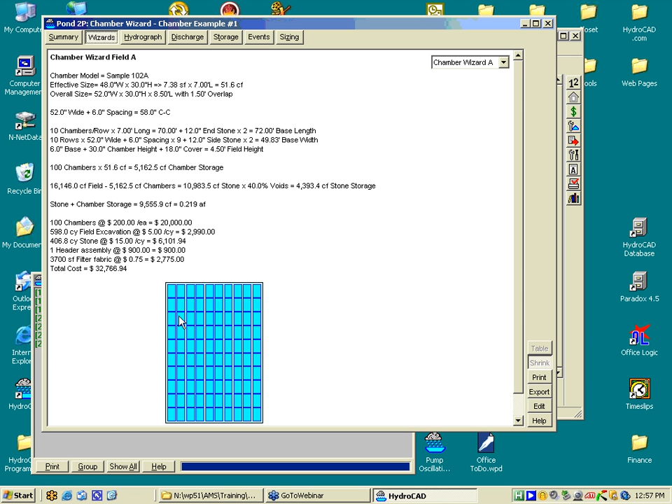In HydroCAD 9 onward, we have a new chamber wizard that makes this process much, much easier. With the wizard, you basically just pick the chambers you want, and the system automatically lays out the field. Going into the report, here's the output of a typical wizard design showing a storage field and a complete analysis of that field. Setting up those fields is really easy.

Just to show you, I'm going to drag in a brand new pond, so there's no preset data here, and we'll double click to edit that pond and make it a detention pond, then go to the Storage tab, double click to create a new storage option, and rather than picking one of the basic fundamental storage objects, we'll pick the chamber wizard. With the chamber wizard, we can now pick the particular chamber we want to use in this system.

We can come down here and pick anything we like from this particular list of chambers, and there's a cross-sectional profile of a single chamber. Then we can increase the number of rows in our system or the number of chambers per row, and this lays out a grid with the specified number of chambers.

Now we do need to put stone under these chambers, between them, and on top of them, for structural reasons as well as the storage it provides, and we can set those parameters over here. We can increase the row spacing, increase the stone underneath the system, or just click the box up here to use typical spacing, which presets all of those parameters to the manufacturer's recommendations.

So we have now designed a complete system using these 9 chambers with the necessary stone around them, and this is a complete analysis of the system. We can even put in the cost for each chamber, put in excavation costs and stone costs, and get an estimated cost for the whole system.

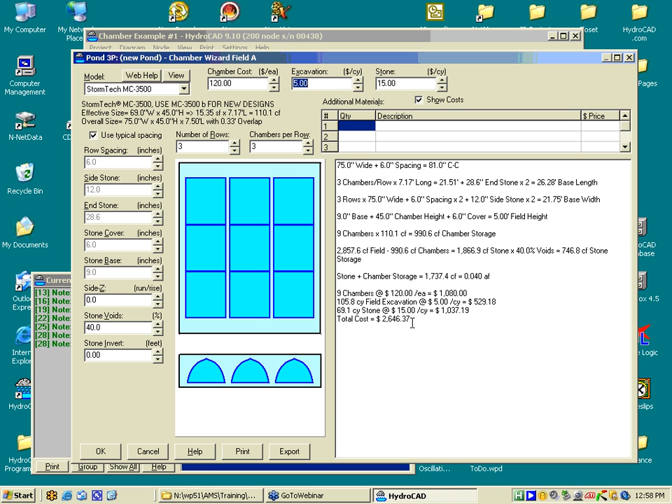When we click OK on this, HydroCAD, or the wizard, has now created automatically these 2 definitions: it's got the outer stone field and it's got the embedded chambers. Click OK again, and then if we double click our pond to open up a report, we have a complete storage calculation for that system.

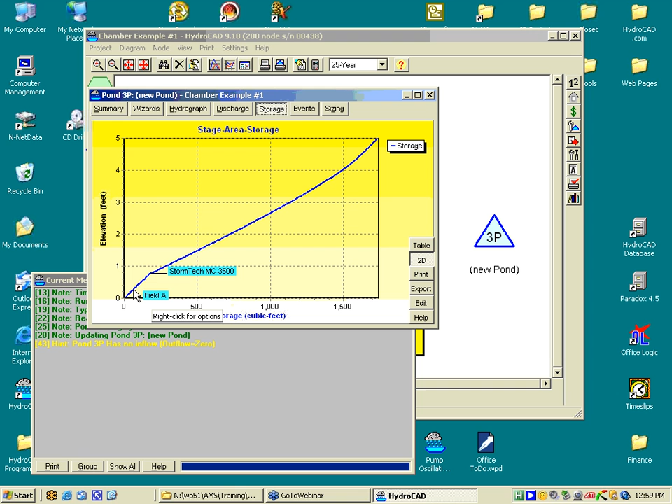So we have the stone field at the base, storage in the stone, and then the chambers, and then the stone cover. And if we needed more stone in that system or more storage, we can just click Edit, go to Storage, double-click to reopen the wizard, and we can increase the number of rows or the number of chambers per row until we get the total storage that we want.

So we have our total here of 9,387 cubic feet. And just OK twice, and our report is automatically updated. And of course, we could have an inflow coming into that from our runoff system. But this is to show you how quick and easy it is to set up those storage definitions using the wizard, and you can combine these, of course, with other storage elements.

So you may have storage contributions from an adjacent manhole, a pipe system, or even above-grade storage in a parking lot as your stormwater overflows. So that's a quick look at underground storage and the storage wizard in HydroCAD. That's essentially what I planned to cover today. Are there any questions, or Bruce or Gary, are there any other things that you'd like us to have a look at?

Well, go ahead. No, you go ahead, Bruce.

Well, my comment would be that there is so much subtlety and advanced features within HydroCAD that it just makes a perfect combination with the basic DTM and layer-based data extraction features of the Carlson side. You might say that any level of pond design can be accomplished on the HydroCAD side with meeting jurisdictional requirements all around the country through the history of that product in the marketplace.

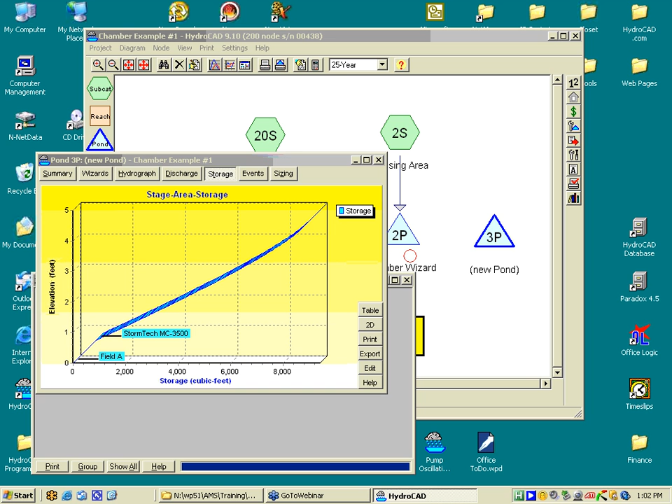I do know that we have, under the network pull down, under sewer network libraries, the ability to define 7 different types of rainfall events, not all of which apply to this SCS pond sizing, but we have the TP40, which was, I believe, the method we were using. We have the Hydro 35, and of course we have IDF curves, rainfall intensity charts that you can enter, and so we have a variety of methods of entry, but I'd have to sort of defer really to Shan on that question.

Okay, that's great, and also the choice there too is to do the rainfall. And Peter, I think you're showing some of how HydroCAD can deal with that question. Exactly. We've got an extensive rainfall library in HydroCAD that provides most of the local rainfall distributions that folks are using in specific jurisdictions, in addition to the standard NRCS or SCS distributions. And you can set those rainfall depths according to TP40 or other documents.

We also have coming the ability to automatically import complete rainfall information from NOAA's precipitation data server, and also from a new New England data server, which is now coming online. And this process will automatically generate mass curves for any point on the map. So we're actually moving towards complete GIS-based, location-based integration, and this is going to gradually phase out the Type 2, Type 3 rainfalls, it appears, since they were done in a very general manner in the 80s, and we now have much more data to go on.

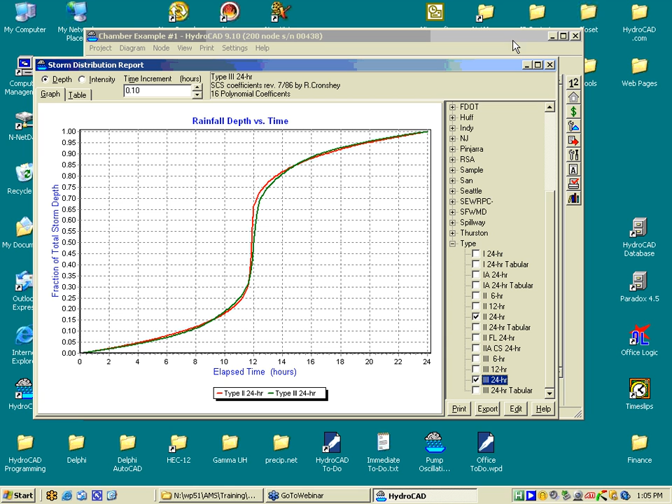Real quick question, Peter: when you were doing the pipe, the riser, and putting in the additional parts of the pipe there, the question was if it's a perforated pipe, basically. If it's a perforated riser, do you have to add a structure for each hole in the pipe? What you can do is use what I refer to as an orifice array.

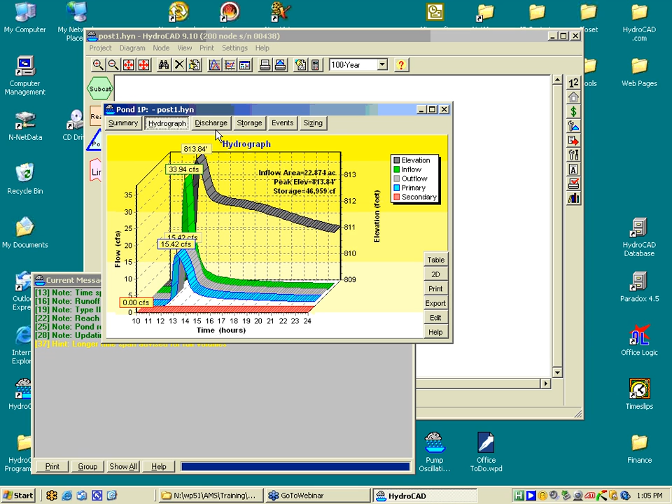So going back to the side orifice we had, if that was just, let's say, a 1-inch hole, we could specify the number of openings we have, and this can include columns. So if it's perforated up, we'd specify that there are 8 rows, and we could put a 2-inch spacing between the rows. So that's the way you'd handle a perforated pipe, and just click OK, and we're all done. And we now got those perforations right up the side of the riser.

Great, thank you. Excellent. That's really all the questions. You guys did such a good job. I think you covered things extremely well. And by the question list, that appears to be the case as well.